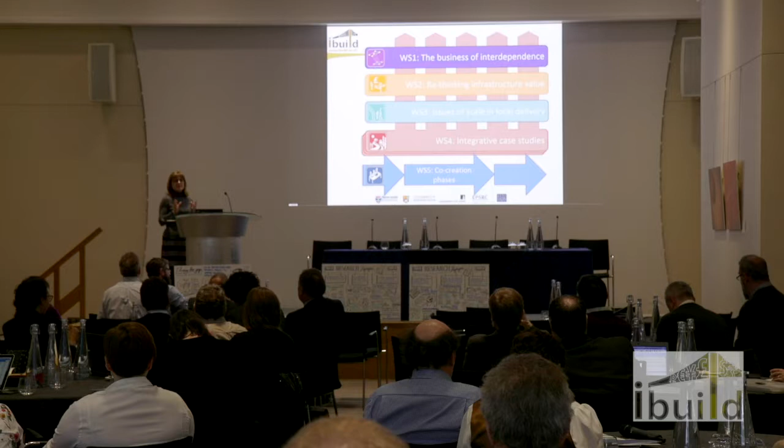At the start of the iBUILD project, there were a number of different themes: interdependence, value, scale and local delivery. Those were all integrated through a number of different case studies, some of which you've heard about already this morning. We were developing this idea of co-creation, working in novel ways with researchers and practitioners from different disciplines.

Keeping those icons in mind, we tried to develop a framework using all of those different themes from the iBUILD project. It's about finding ways of identifying interdependency and how we might utilise those in generating a new business model, thinking about the influence and impact of scale on those projects, doing that collaboratively with different stakeholders, and drawing upon the very different case studies we've created across the three centres.

I'll give a broad run through of where we've got to with the framework and how it works, and then we'll work through a workshop so you can actually get a look at that hands-on.

Relating that to the report, there's more information written about this in recommendation 14, the final recommendation in the report. It's trying to capture what I've just said in one sentence: developing new business models by collaborating with a wide range of stakeholders, integrating that broad set of values, and using that to design different engineering solutions.

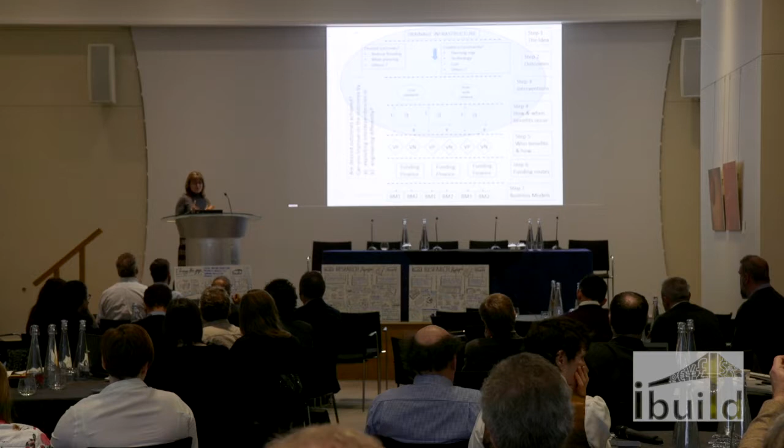The desired outcomes are, very simplistically, reduce flooding and meet planning regulations, though there may be a whole host of other things. The enablers and constraints are things like planning, what technologies are available, what the cost is, and again there may be others. Traditional solutions to this are pipes, essentially.

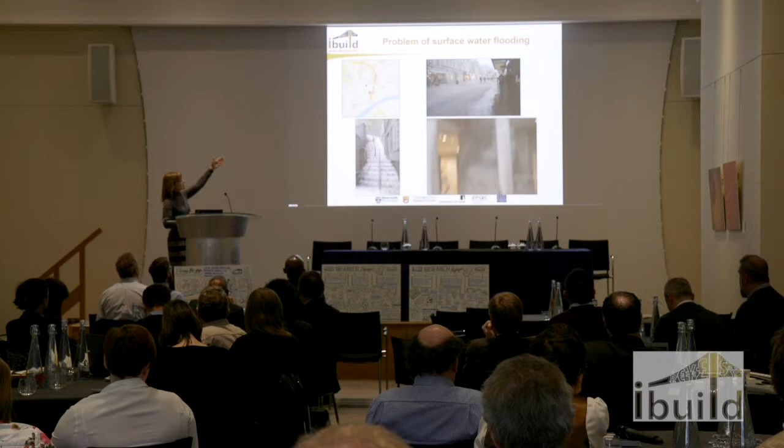Just to illustrate that - I don't have a pointer, I don't think - but the map at the top left is Newcastle, and the top red dot from Google Maps is Northumberland Street, which is the picture on the top right. That's a very typical place in a city - it's very grey, it's got boring shops in it, and that's what it looks like when it rains.

But that isn't the only problem. Spatially, it's not just Northumberland Street that has an issue. If you look at the map again, the dot further down towards the river - when we experience the extreme rainfall event, we've got this picture and the little video clip. Those are part of the wider scale impact of surface water flooding, and if you imagine that it all flows downhill, it ends up in the river, in the Tyne. That's the sort of problem we're talking about.

The traditional interventions to address that problem, as I say, are pipes. I've taken a bit of liberty here because they're not entirely addressing the surface water issue, but bear with me. So we've got pipes, and ultimately they discharge into the river - you've probably all seen these large pipes that get put down underneath roads, and you end up with this diversion issue.

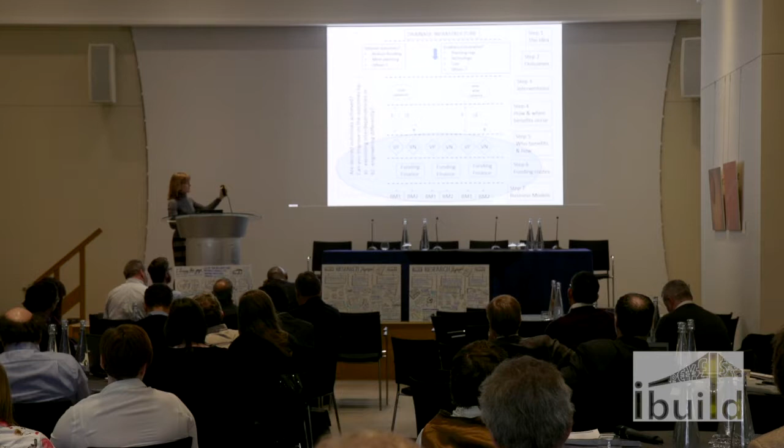So actually quite a limited number of organisations in that value network. If we come to look at the value proposition and value network from those pipes we're going to construct, we'll look at what the funding and financing options are and what the business model is for those pipes.

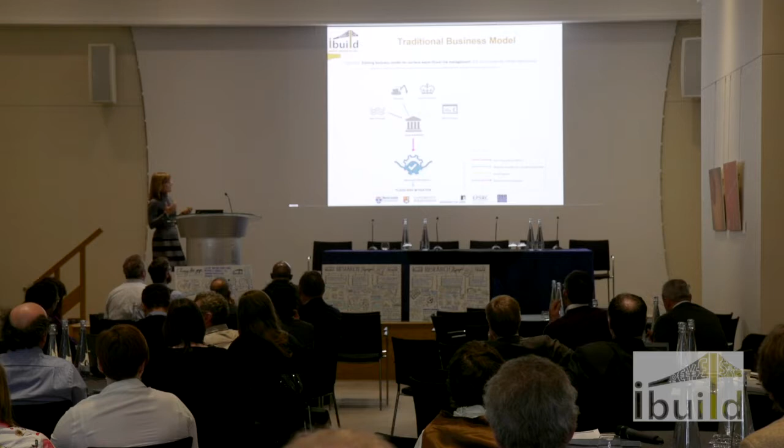Actually, our options are pretty limited. We've got the water companies, the local authority, and if we were doing a new development rather than putting these into Northumberland Street, we've got developers, and we've got potential sources of grant funding from central government or from third-party grants. But essentially, all we're actually delivering is flood risk mitigation - that is it. And when they're in there, Northumberland Street looks exactly like it is now, just with less water.

Using our framework then, what we should do next is challenge ourselves and ask, have we achieved our desired outcomes? Well, yes, I suppose we have. We might not have done so for a very long period, but we have for the time being. But could we do better?

Could we do better by considering green infrastructure? So instead of concrete pipes, we might put in something that holds and stores water on the surface instead of channeling it underground and discharging it to the river. The interesting thing is it slightly changes the governance, because as far as surface water is concerned, when it's on the surface, it's the local authority's problem or ownership. As soon as it goes below ground, it's the water company's ownership.

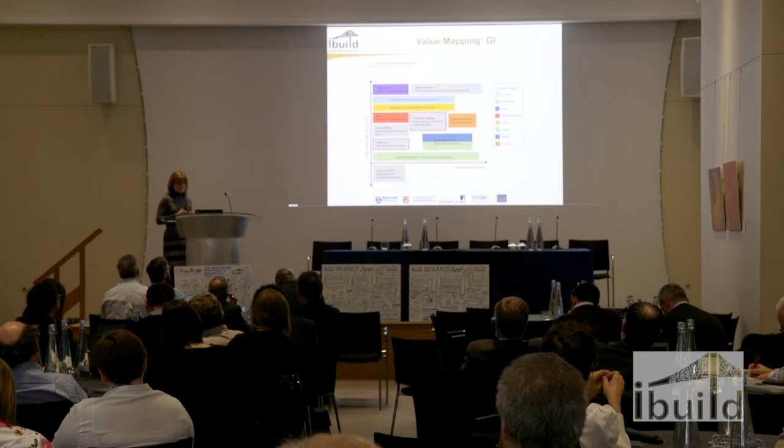So your capacity to be innovative in terms of the business model you might use with green infrastructure is very much greater. So I think that's possibly what I have got there.

The alternatives, again this is the alternative in the diagram in your report, include all those different possible people as part of the value network, and they include the non-monetary contribution to the business model that John was talking about before lunch, where individuals might contribute labour and time to create some of these green features. It might be fairly modest, but they could become involved in a way they can't currently with those pipes. They may get involved in construction, they may get involved in maintenance.

So as you can see, it creates a much richer and more diverse picture of a business model that can be created, and the services generated by that green infrastructure aren't just flood risk mitigation. They include recreational space, improved public realm, wildlife corridors, etc.

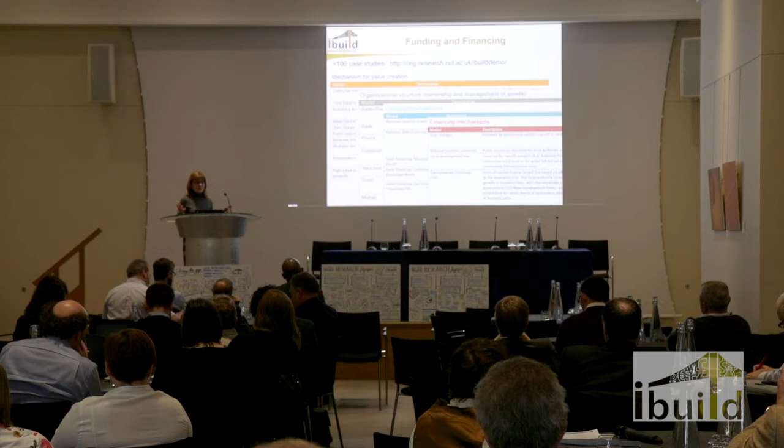So in order to look at the business model that's possible, what John and his team have created at Birmingham is an online resource that we've already seen in one of the presentations. So to actually construct the business model, there are these different mechanisms for value creation in this online tool. There are different organisational structures, funding and financing mechanisms that anyone could use via the iBUILD website.

So that's a very quick run through that whole framework on how you might be able to use value to create this new business model. But what we've found working with iBUILD is that all its diversity will not be created by a few people sitting in a darkened room. Actually, what you really need to get all that diversity out is some sort of co-production process.

So whatever infrastructure you're trying to look at, the tools you need will change. There are some interesting posters next door on different experiences of this co-production, including some of those visualizations. People need to be able to see what the different opportunities are. You need to get people talking in the room, and they often don't talk the same language.

So this whole process of developing the business model isn't quick, but it's something that hopefully you'll have seen and realise is actually really worthwhile.